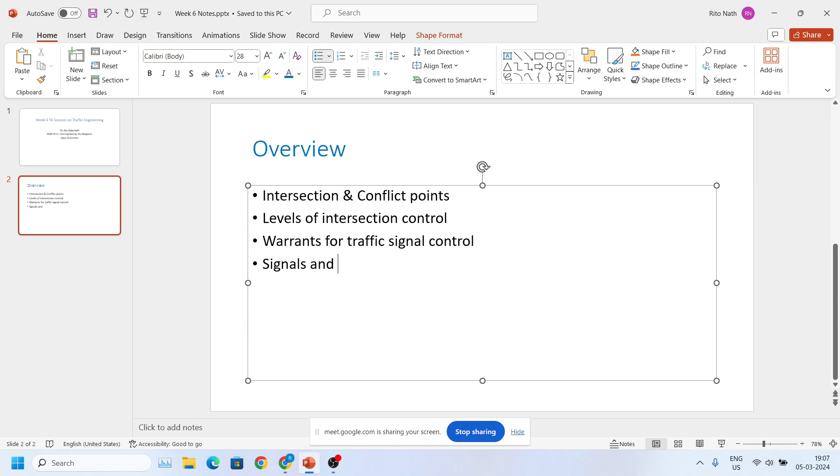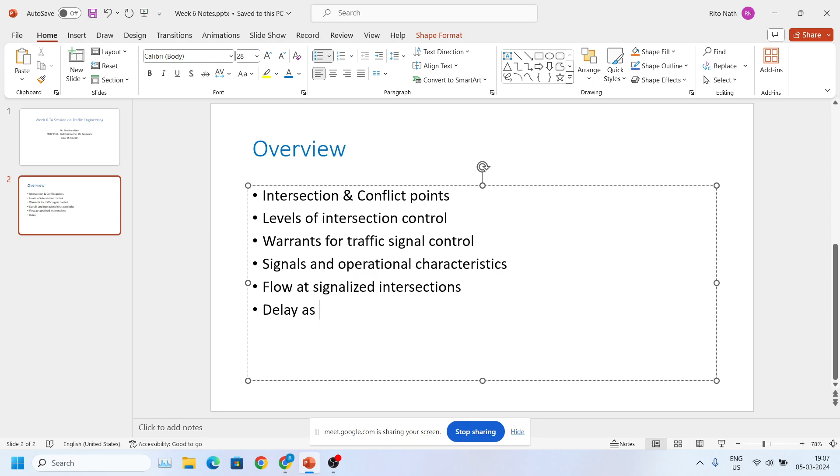Then the next topic is on signals and operational characteristics. Next, I think there was discussion on flow at signalized intersections. And I think there was another discussion on delay as a performance measure. So these are the topics of interest in this session. And let's get started with some of the concepts of the first topic, which is intersection and conflict points.

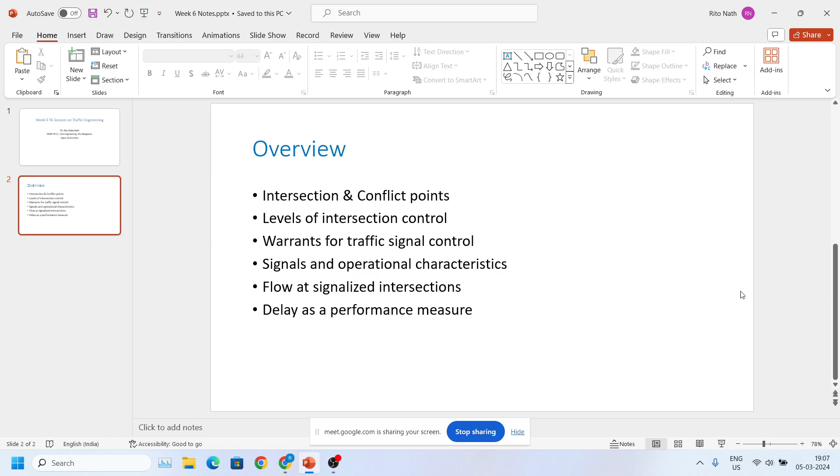So let me, okay, I think someone has joined.

Okay, so let's start with this topic, intersection and conflict points. Now here, first, I think there were basic examples that were given where two or more roads kind of meet, like converge or diverge. So that is called an intersection. And there are certain major accident spots that you can identify because of those. And that's how it's related to conflicts as such. And the key considerations in intersection design, let me write those.

These are satisfying traffic flow needs with available capacity. And one more thing is enhancing the safety. And because you need to enhance safety, you have to identify the conflict points. So conflict points, if I have to define it, they are locations where traffic movements merge, diverge, and or cross.

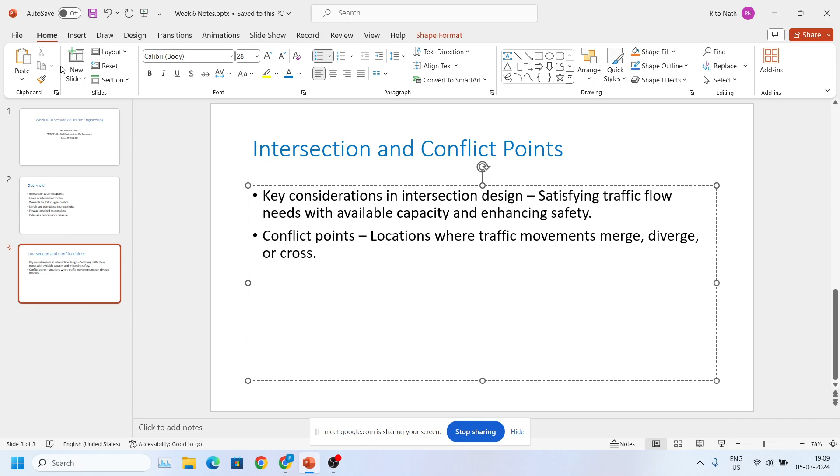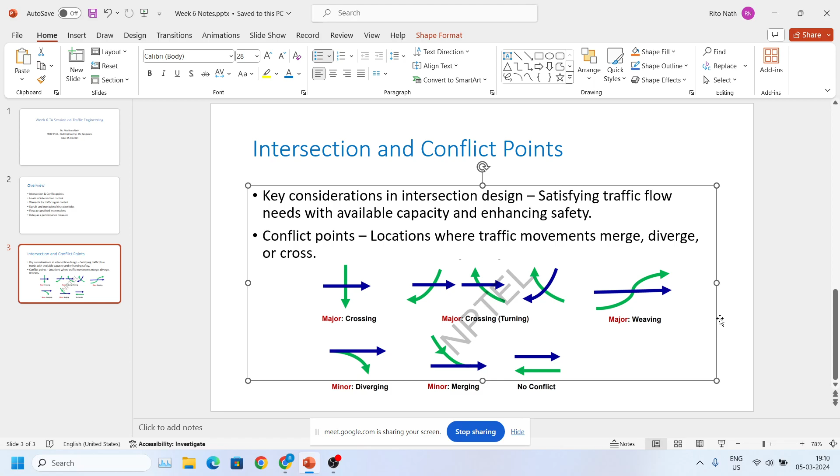So now there were different examples given of these conflict points. So let's see some of these. Okay, so we had this figure in the slides. So here you can see that the first one is showing the crossing of two, say, major roads. One is marked in blue, another is in green. Then there is this crossing that happens. So there is this through moving traffic, and there is some crossing that happens.

And the crossing can be in this kind of a nature as well. Weaving happens as well. And these are examples of diverging and merging. And this is a classic example of where there is no conflict. So these are the potential spots where accidents might occur, and that's why you have to enhance safety, and you have to identify this first. And based on that, you have to come up with certain safety measures that we'll talk about later.

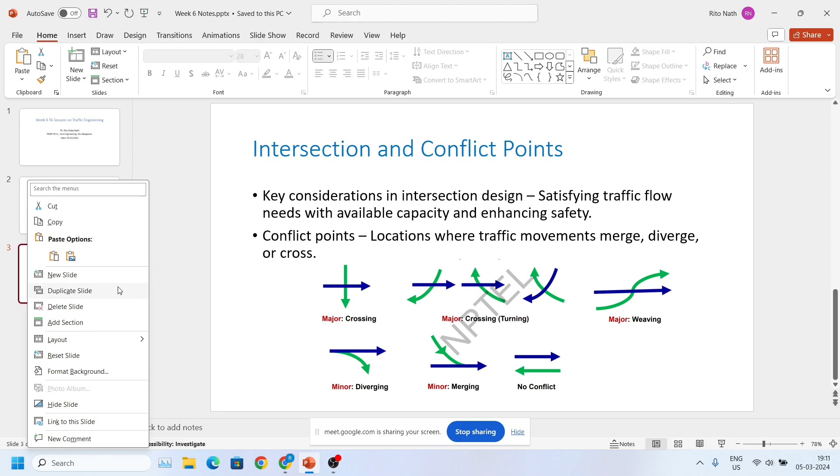So the next thing that was discussed was two different kinds of intersection, and how many conflict points there were. So the complexity of this was shown. So let me open another slide. So it's on intersection and conflict points again.

And let me just do this and insert an image. So these images, these two typical examples were given in the class. So where you have a four-legged intersection, or you can call it a single approach four-legged intersection, and another is a three-legged intersection. And it's nicely shown in the figure where the crossing happens and where the turning happens and the merging and diverging happens. And using this, you can find out exactly how many conflict points you have for both these types of intersections.

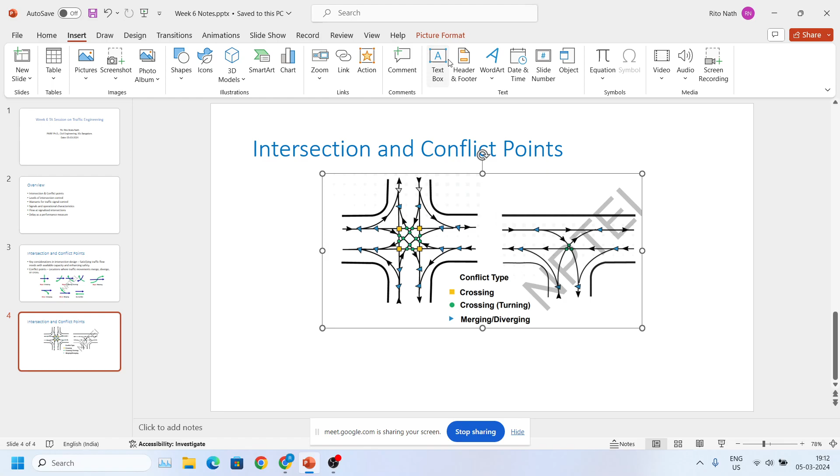So, as I have already mentioned, intersection crashes are related to the number of conflicts that are present in the intersection. Now, if I have to write down the number of conflict points in this scenario, let me do that. Let me insert a text box. So for the first case, it's for a single approach four-legged intersection. So here what you have is, let me increase the font.

So you may be asked to determine the number of conflict points. So there are three different kinds of those. One is crossing plus turning. Then another could be merging, and the other could be diverging. These numbers you can easily find out using these figures, and since these are already marked here, the crossing that you can see here, there are 4 points where this crossing happens. And then there are other crossings that you can also call turning. Those are these green points that are in between.

So these are three for each of the four directions. So 3 times 4, those are 12. So this is 4 plus 12. So this happens in this portion that you can see. And these are in total 16. So this is 4 plus 12 equals 16.

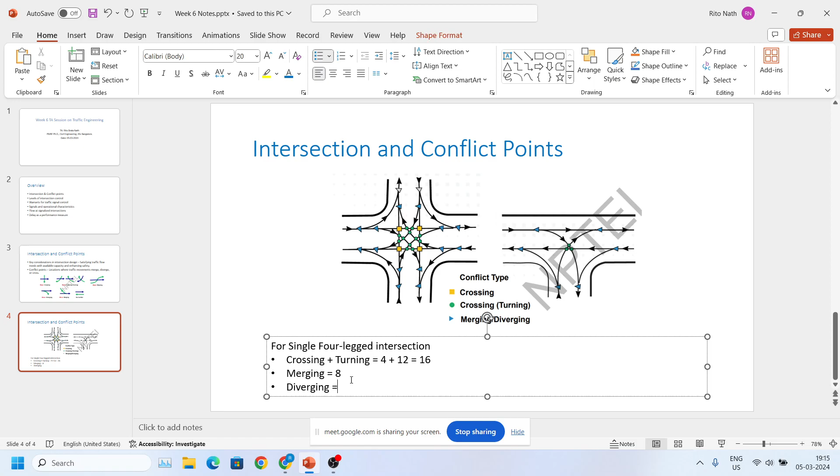Then for merging, you have these blue markers that are shown here. So here, I think you can notice that there is this merging happening here. These are marked as blue. Another merging happens from here. This is marked as blue again. Diverging is also marked as blue here. So this is an example of diverging points as well. And if you work it out exactly, you will find there are exactly 8 merging and 8 diverging points. So the total number of conflict points is 32 in this situation.

Whereas if you look at the other figure, which is a three-legged intersection, you can notice that the number of conflict points is significantly less than in the other scenario. So here, I think you don't even have a crossing conflict type. For the turning, you have around three. Yeah, it's these three that are present. And then you have merging and diverging. This is a merging one. Then this is another merging. And here there's another merging. So you'll find three merging and exactly three diverging.

So similarly, you can write, it's going away. Just reduce this. So for the three-legged intersection, you have crossing plus turning equals 0 plus 3. Then you have merging equals 3 and diverging equals 3. So the total conflict points here is 9. So you can draw these kinds of conflict diagrams and come up with these numbers, and that will tell you how probable it is to have crashes at those intersections. And then we'll move on to the measures and talk about it later.

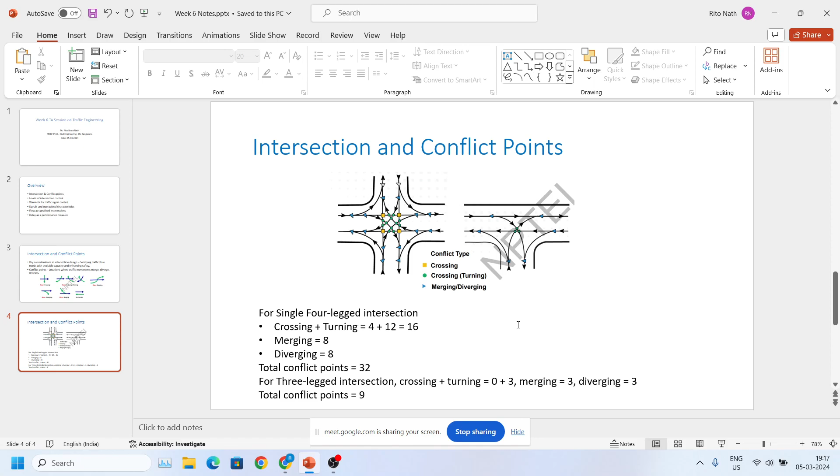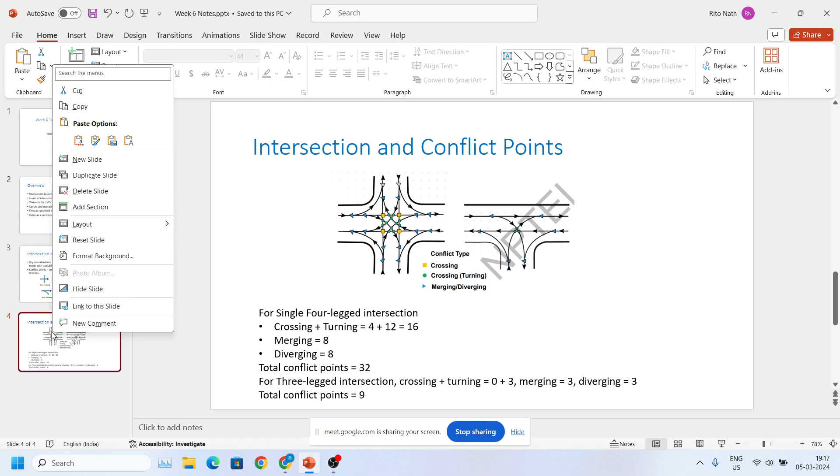So now there were discussions on factors that affect a driver's ability to avoid conflicts. For which there is a simple illustration that would be helpful to understand. So let me just copy this. So here there was this figure which shows that this vehicle wants to move to this lane in this intersection, but this vehicle is also coming from the opposite direction, and this vehicle is also moving in that direction as well. So typically, if you have a buffer zone like a 4 second or 6 second gap here, you can do this movement without any issues.

But if this is not the case, if the density is high and the headway is less, then you might need some measures to control traffic and so on. So, there should be reasonable opportunities for safe maneuvering at the existing volume levels. If they are there, then the driver is able to avoid conflicts. Now, intersection design typically aims to minimize the number or the severity of potential conflicts. So let me write it down. Let's insert the text.

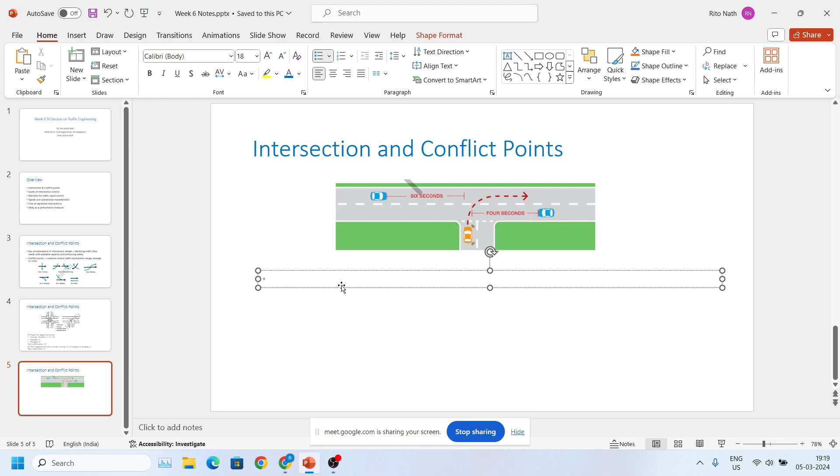So the key points that you have to remember here is that this is typically done to minimize the number and the severity of potential conflicts. And this can happen between different vehicles as well as pedestrians. So it can be cars, buses, trucks, riders, pedestrians and so on. So that's the aim that you have for this intersection design.

And there are different ways of doing it. So different approaches include, one is priority control, the other is space segregation. I'll talk about it in detail later. And then there is time segregation. Okay, so that's the basic concepts of intersection and conflict points. I think the next discussion is on levels of intersection control. So let's move on to that discussion.

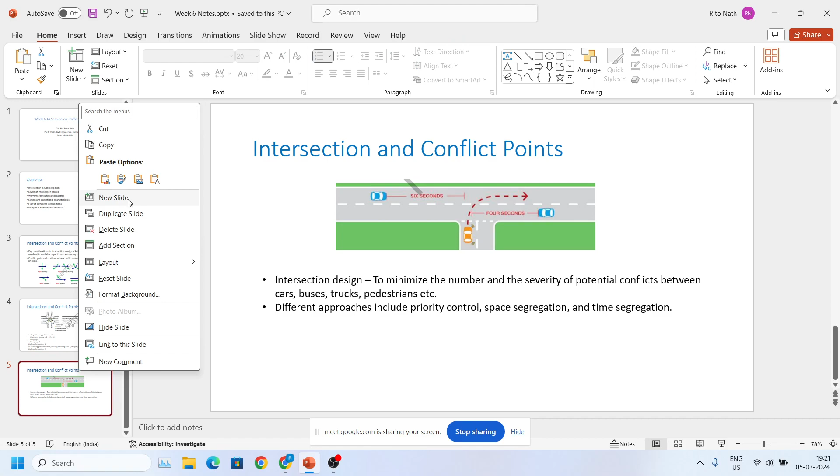So here I'll be talking about levels of intersection control. Okay, so we have three levels of intersection controls, and these are classified as level 1, which is named as passive control. Then you have level 2, which is semi-control. And finally, you have level 3, which is active control.

So in passive control, these are typically basic rules on the road, and this includes signs or road markings and so on. In semi-control, you have a direct assignment of right of way using yield and stop signs. Then you can have channelization as well. And finally, for active control, there are two different things. One is signals, and the other is grade separation. Okay, so these are the basic things.

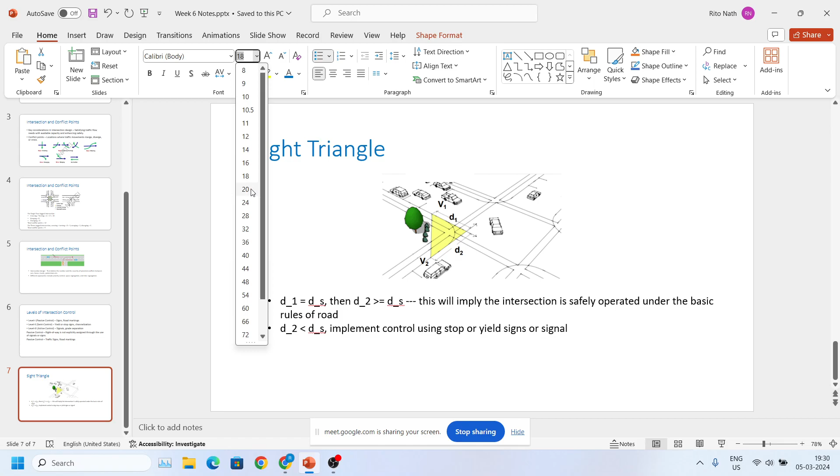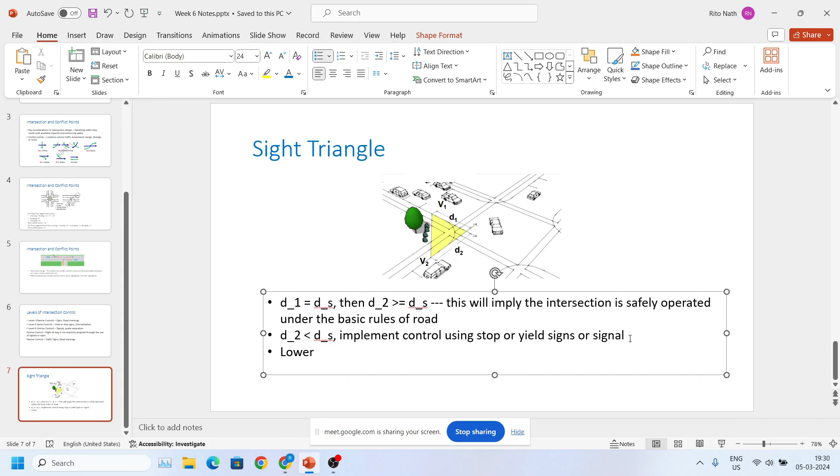I think it was discussed in the class that though this sight triangle should be clearly visible without any obstruction, in the Indian context you don't typically have those kind of scenarios in many places, because you might be having a shop and so on, or there could be some other structures present there. So typically for safe movements, you have to have this kind of a scenario, and these conditions have to be satisfied. So maybe I'll just quickly write down the remaining key points here. Lower the speed limit on the major street, or remove the sight obstruction.

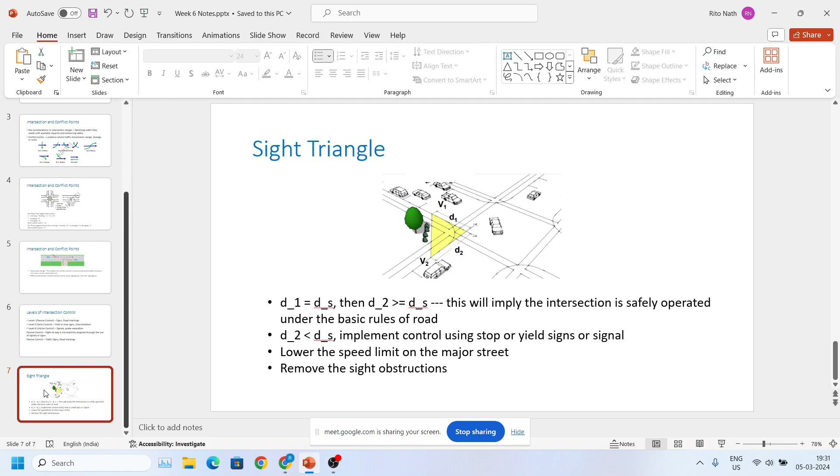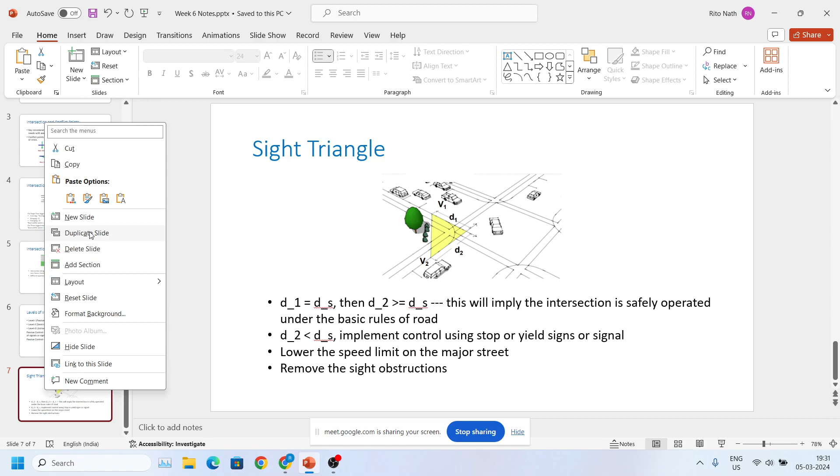Okay, so this was the preliminary discussion on this topic, intersection and conflict points. And after that, in the next module, it was E2, I think. So till now it's a very simple discussion on passive control. We have talked briefly about signals and so on, but that comes later. Before that, we can have a brief discussion on semi-control. So let me write this down. So let's discuss more on these levels of intersection control before I move to the problems that we'll find in the assignment.

So here, let's talk about level 2, the semi-control. As you'll be knowing, this includes the stop or yield signs that I have discussed. So let's quickly have a picture. These are the typical settings that you have for this level 2 intersection control. Here the major or minor roads where this is applicable, where the right of way rule would not be expected to provide a reasonable solution, and the minor street entering a designated through highway, or unsignalized intersection within a signalized area and so on. So that could be the settings here.

Okay, so next, this is a stop sign example to begin with, where the vehicle has to be stopped completely. Then there can be another, the yield sign application, where vehicles controlled by yield signs need to slow down to a reasonable speed. So those are the basic differences of those two. Maybe I'll just add a text.

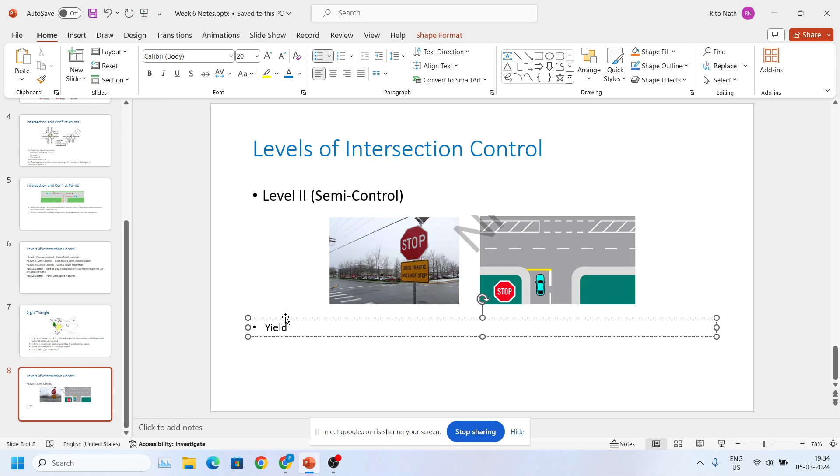So let's talk about the first one, which is the yield sign. Vehicles need to slow down to a reasonable speed. And a stop is not always required, like a full stop. So there can be an example, say, for a channelized turn lane that is separated from the adjacent travel lanes by an island.

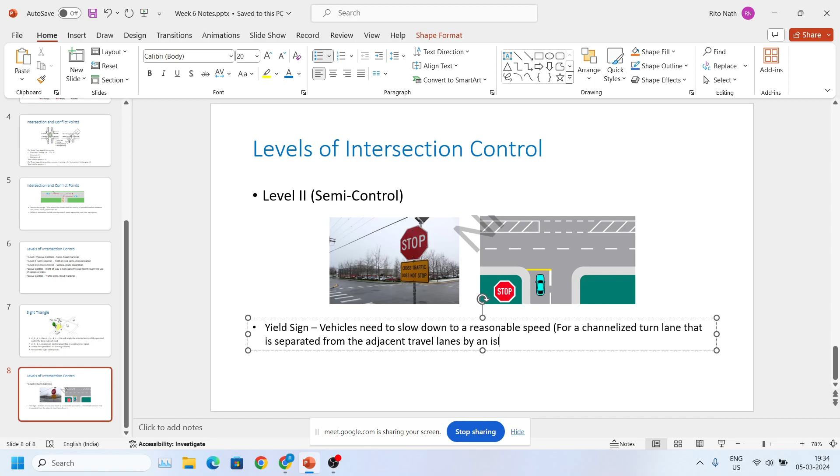Then, if you look at the stop sign, a complete stop is required, as the name suggests, and a stop is always required on minor streets because of one or more of the following conditions that were there in the slides. The conditions included the vehicular traffic volumes on the through street, then other factors such as restricted view, and crash records, like the past crash history records.

So based on that, you have some criteria whether to put a stop sign or not. Like if you have more than, I think, 3 crashes in a year or more than 5 crashes in a 2 year span, then you have to put a stop sign at that intersection. Okay, so the next discussion was on channelization using this concept of level 2. This is a semi-control measure. So maybe I'll just add one more figure.

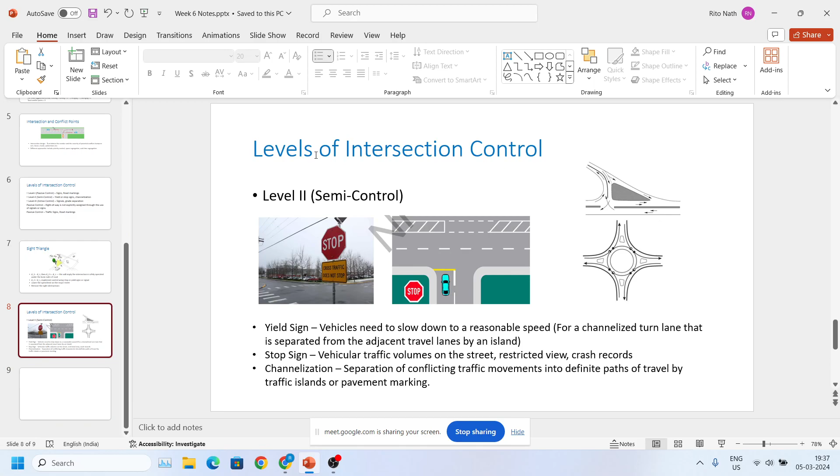So the third one, level 3, is the active control. This is applicable for high intersection volumes, restricted sight distances, and related crash history that I have mentioned. For that you need traffic signalization, which is time-segregated right of way assigned to the various traffic movements, so that will reduce the conflicts.

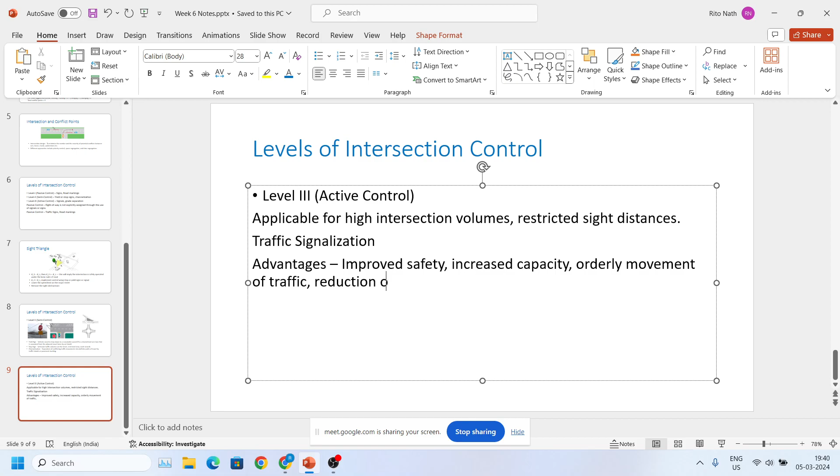Traffic control signals are devices usually installed at grade intersections in built-up areas. They can enhance safety, increase capacity, give orderly movement of traffic, reduce crashes and so on. But there are certain disadvantages as well, so let's write down both. Advantages could be improved safety, increased capacity, orderly movement of traffic, and reduction of severe crashes and so on.

But on the other hand, to ensure all those things, you will end up with some disadvantages, which include increased delay, increased use of less adequate routes to avoid traffic control signals, and a potential increase in the frequency of rear-end collisions and so on, but delay is the main thing here.

Then there was a brief discussion on grade separation, which also falls under active control. You go for it when signals cannot have a significant benefit in reducing the conflict points. This will give you greater safety, efficiency, and capacity. There could be highway grade separations without ramps, and interchanges. Those are examples of grade separation.

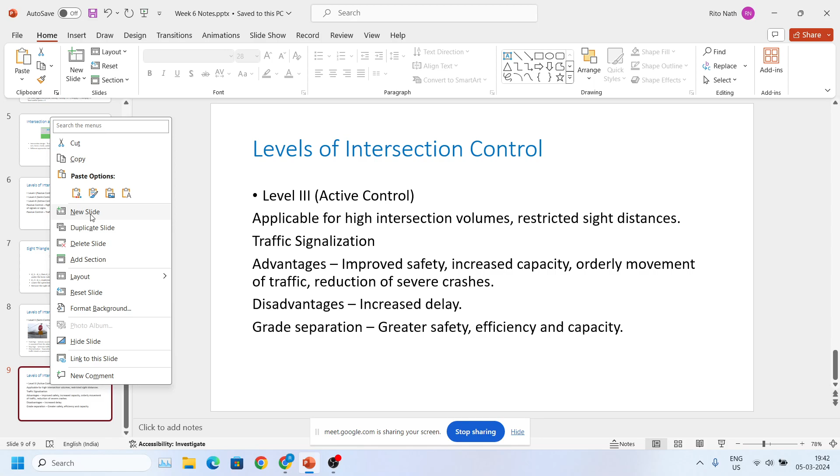Now, there are different warrants for interchanges: highway full control of access, insufficient capacity at the intersection, disproportionate frequency of serious crashes, long delays, and so on. These warrants were discussed somewhat later. But before that, there was a brief discussion on data requirements for justifying traffic control signals, with different kinds of data, one being a period of 12 hours. So let's discuss those data requirements.

Here, the number of vehicles entering the intersection in each hour from each approach during 12 hours of an average day. And there are metrics on volumes: vehicular volumes for each traffic movement classified by vehicle type during peak hours. Then pedestrian volume counts, then delay data, stop time, delay data, and queuing information and so on.

There can be other data requirements like information about nearby facilities, the statutory speed limit or the 85th percentile speed, so speed limits. Then the condition diagram, which tells you the physical and geometric features of the intersection. And the collision diagram, which gives estimates of crashes by type, location, direction of movements, and so on. So these are the data requirements.

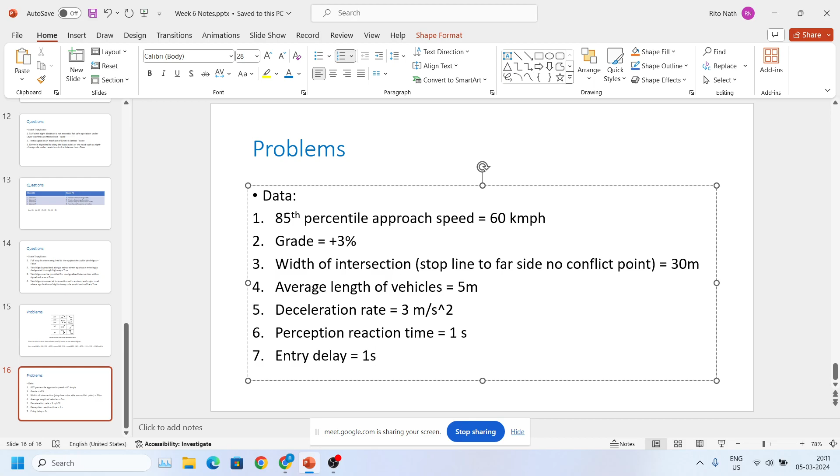Next you have average length of vehicles. So this is 5 meters. Next you have deceleration rate. This is 3 meter per second square. Then you have perception reaction time equals 1 second. Then you have entry delay, 1 second. Okay, so next is cycle length. That's 60 seconds.

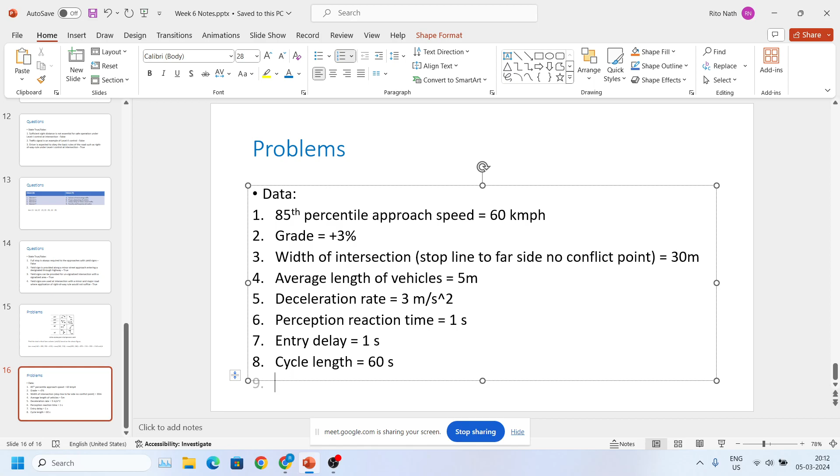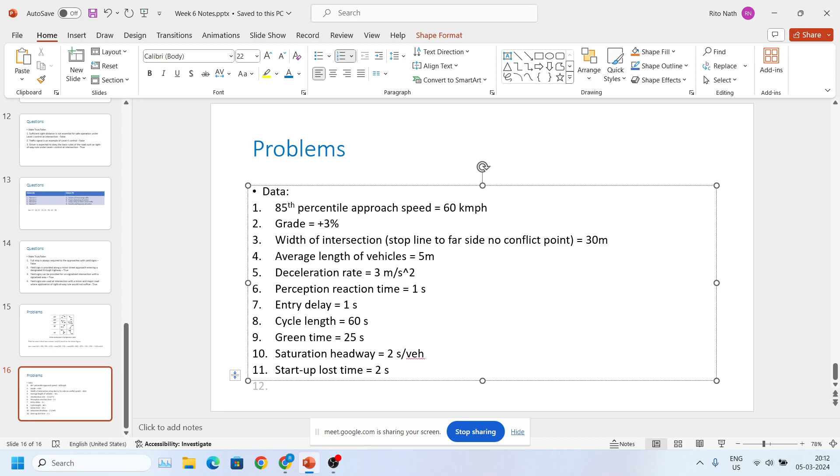Then you have green time. So a lot of data given. 25 seconds. Saturation headway is also given. So that's 2 seconds per vehicle. And then start-up lost time. That's 2 seconds. Finally, I think you have clearance lost time. That's 1 second. So you have to solve a problem based on this entire data that you have. Let me write it down here itself.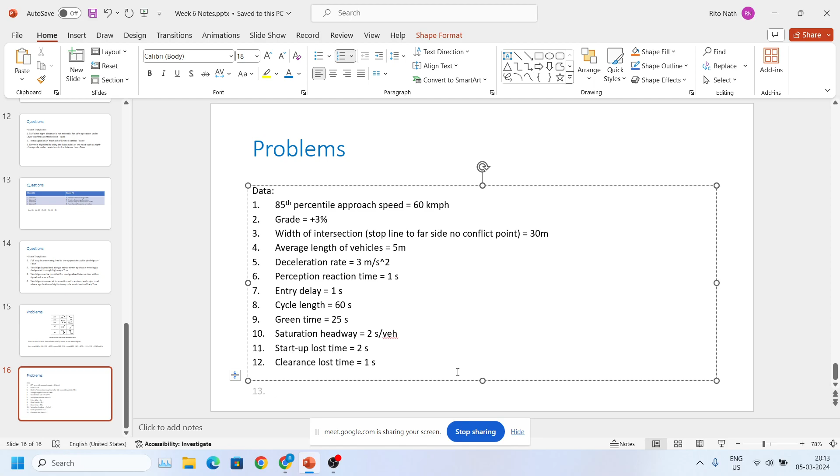Find the yellow change interval in seconds. Okay, so what would be the approach to solve this problem? Let's see how we can solve it. Yeah, so there is a formula that you have learned in the class. So you can directly apply those and you can get the solution. So I'll display it for a bit so that you can get the data and then work it out and tell me the answer, and then I'll solve and check if that is correct or not.

So the value of G, okay. So that is not given, is it? Okay, got it. Yeah, so it's given actually. G is grade, right? It's written here. Grade of the approach. So the answer you are saying is around 4, is it? Okay, so let's check that. I'll give you the solution in the next slide.

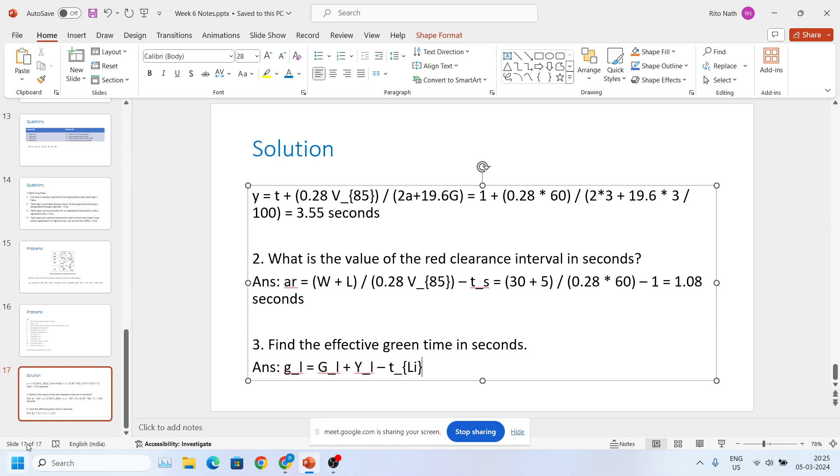First, you have to find the total lost time. So your effective green time, let me write down the formula. So small gL equals capital GL plus YL minus TLi. Now you have to find these components individually. Let's do it in the next slide. So first you can find out what your TLi is. That's the total lost time. So that's L1 plus L2, where L1 is the startup lost time, and L2 is the clearance lost time.

So your TLi is small l1 plus l2. Let's see the data. Startup lost time is given as 2 seconds and clearance lost time is given as 1 second. So that's 3 seconds. Next, this part is done. Then you can find out what YL is.

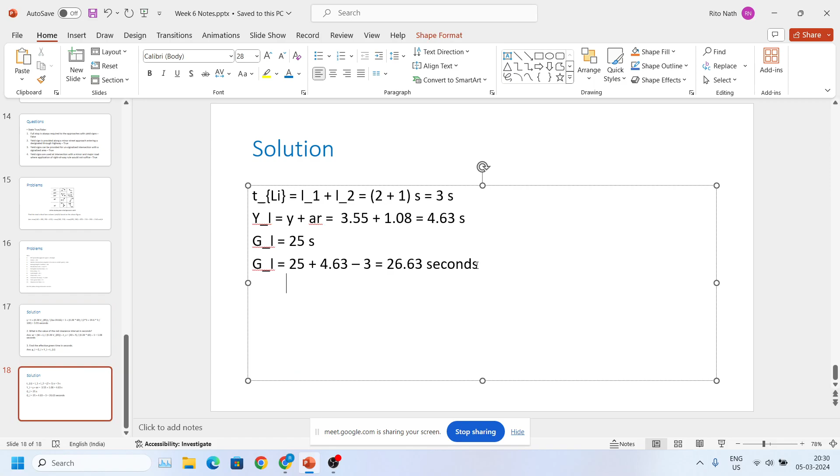Okay, if you're done taking the screenshot, then I'll move to the next problem. Yeah, so let's discuss the fourth one. So this asks you about what is the capacity in vehicles per hour for the approach.

So for this one, I think you have to get the saturation headways first, and then you have to get the effective green as well as the cycle length. So that should give you the value of the capacity of that approach. So the formula is Ci equals Si times gi divided by capital C.

So here you have to find the individual components first. So what is your Si and so on. gi is, I think, this should be small gi, sorry. In fact, this I wrote it as L, but this should be i ideally. So let me just quickly modify this. Yeah, now it's consistent. So gi you know already. C from the data it should come, and Si I think you have to calculate.

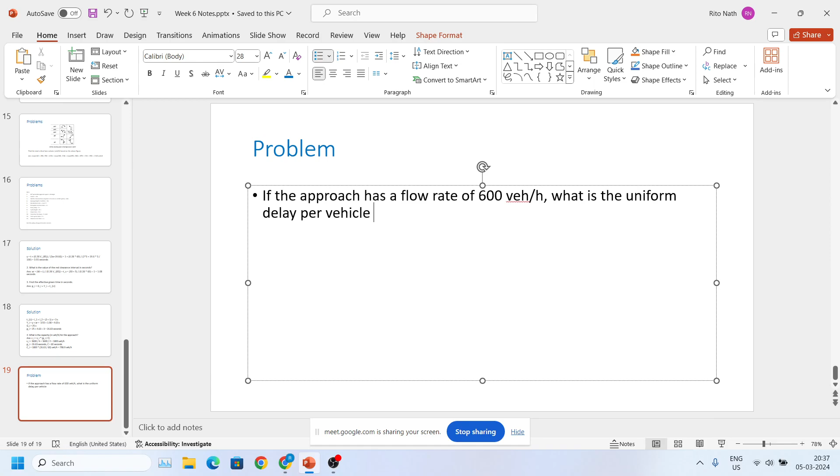So the next one is somewhat similar, but it has some new data, I think. Okay, so if the approach has a flow rate of 600 vehicles per hour, what is the uniform delay per vehicle expected under these conditions? The conditions are given above, right? The data that have been shared before.

So for this one, first I think you have to get the V/C ratio, and accordingly you have to find this uniform delay per vehicle. So the volume is given as 600 vehicles per hour. C is also calculated already. Let me just quickly check what is the uniform delay formula. Okay, I haven't gone into the discussion of delay as a performance measure, but anyway, let's solve this problem.

So this uniform delay UD equals 0.5 times C, where C is cycle length, times 1 minus g by C, this whole square, divided by 1 minus g by C times X. Capital C is the cycle length, g is the effective green time, small c is the capacity of the intersection approach, and X is the V by c ratio or the degree of saturation.

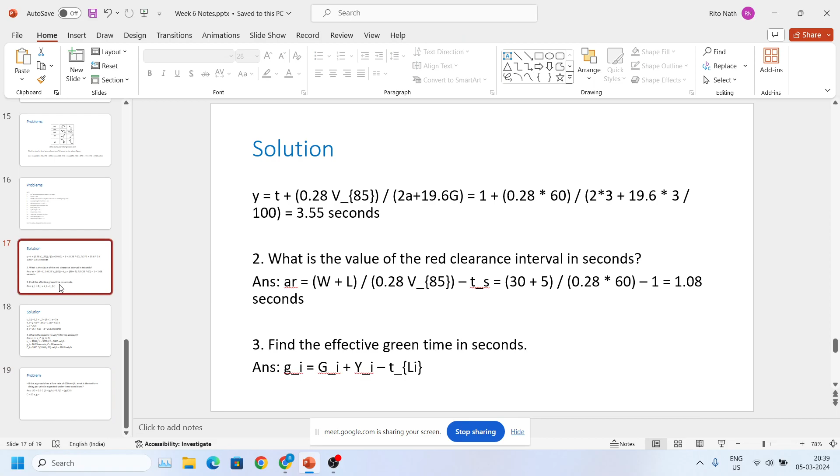Okay, so let's find out these values. Capital C is the cycle length, which is given as 60 seconds. Then you have small g, the effective green time, which you have calculated: 26.63 seconds. Let me check if I'm getting it correct. Yeah. Then you have small c, which is your capacity. Okay, something's off. Just checking this convention of capital C and small c. So there is a doubt. Okay.

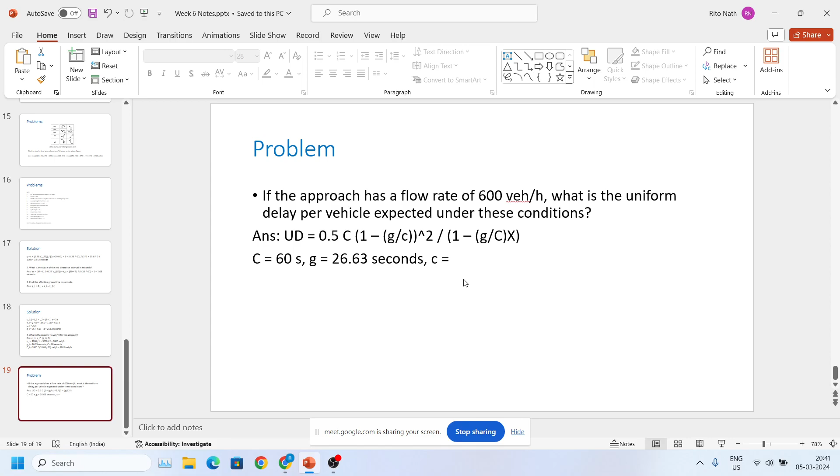Okay, small c is the capacity of the intersection approach, and that is given as 798.9 vehicles per hour. And then you have to find x. Okay, I think here I have written it wrong. This should be capital C and this should be capital C as well. Small c is the capacity of the approach, used in calculating x. So x is the V by c ratio, 600 divided by 798.9. Slight mistake I made, but now it should be fine.

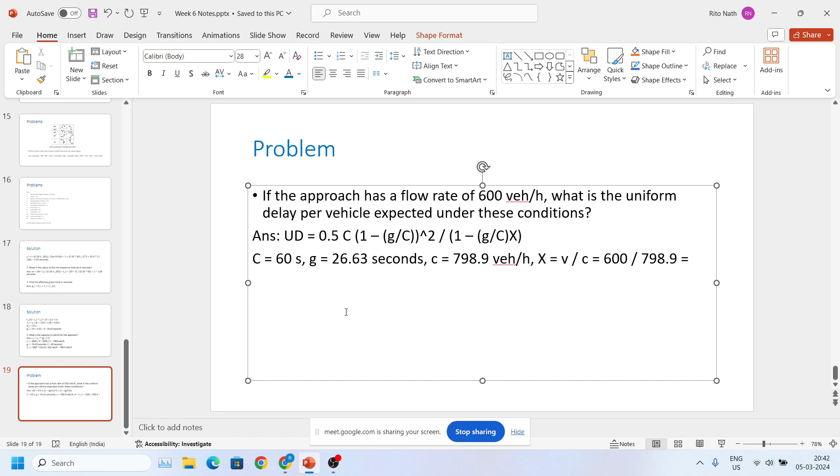So this gives you a value of 0.75, and now we just put in the values. UD is 0.5 times 60 times 1 minus g by C ratio, which is 0.44, squared, divided by 1 minus 0.44 times 0.75. So that should be your answer in seconds. Okay, so let's calculate it.

Yes, or it should be around 14.04, I'm getting. Okay, so did anybody get this? Yeah, I think it should be the correct answer. V by c is 0.75. Yeah, correct. 13.95, I think you got it because of some approximation issues. So yeah, I think that should be the correct answer.

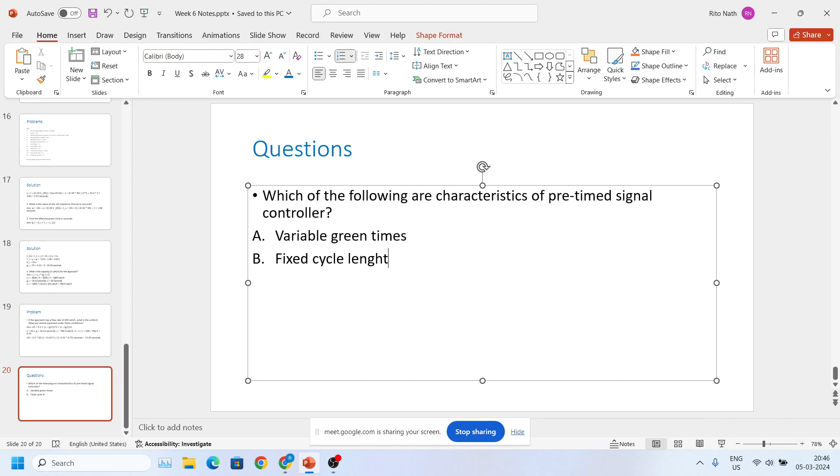So there is one question which says which of the following are characteristics of a pre-timed signal controller. If you go through the lectures, you'll find there are two different types: actuated signal and pre-timed signal controllers. Option A is variable green times. Next one is fixed cycle length. Next is fixed sequence of phases. And the fourth one is used at isolated intersections.

So what would be the answer to this? It's simple, right? There can be multiple answers to this as well. Okay, then what you got? BCD. Yeah, that's correct. So B, C, and D, all of these are correct. There are no variable green times in pre-timed signal controllers. There are fixed green times, fixed sequence of phases, fixed cycle lengths, and they're typically used in isolated intersections.

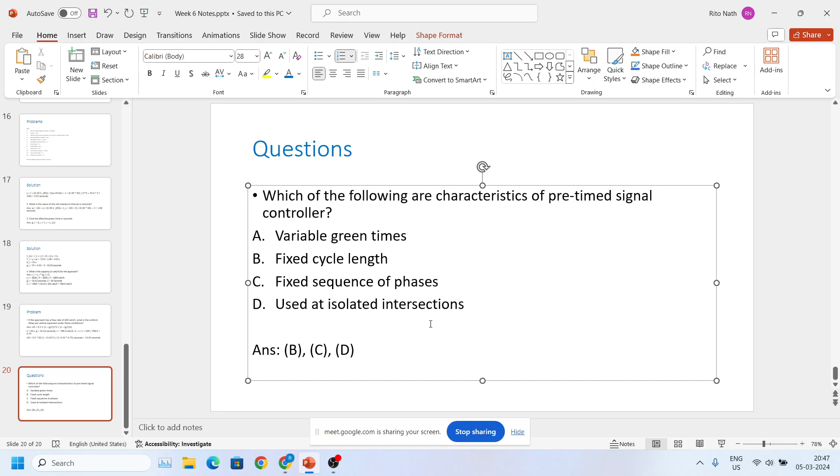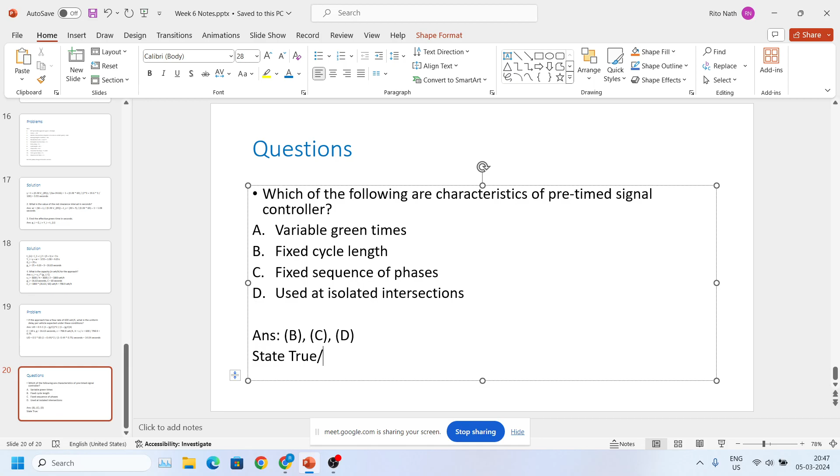So let's do true or false. This says critical lane group represents that lane group in a phase which has the lowest flow rate. So what would be the answer to this? It's again directly from the slides. It's simple. Okay, maybe I'll just put some more into it.

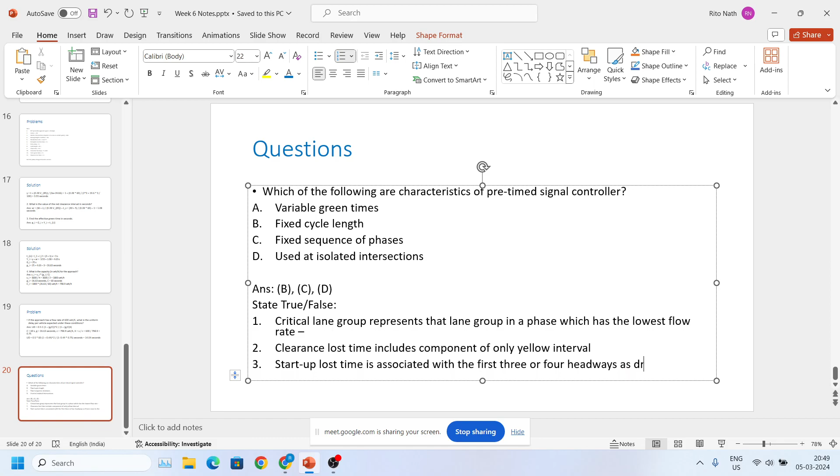Clearance lost time includes component of only yellow interval. Next is startup lost time is associated with the first three or four headways as drivers react to the green signal. Next you have total lost time: it's the difference between the startup lost time and the clearance lost time.

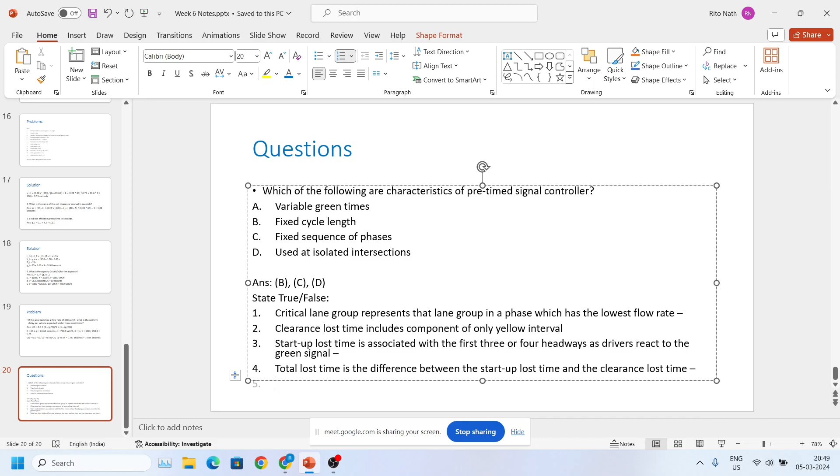Next is end gain is the sum of yellow change interval and red clearance interval. So let's see what would be the answers to these five true or false type questions. Okay, any answers to this? Okay, not yet. So lane groups and movement groups were discussed in the slides, so it should not be too difficult to answer these. Let's see if anyone could answer.

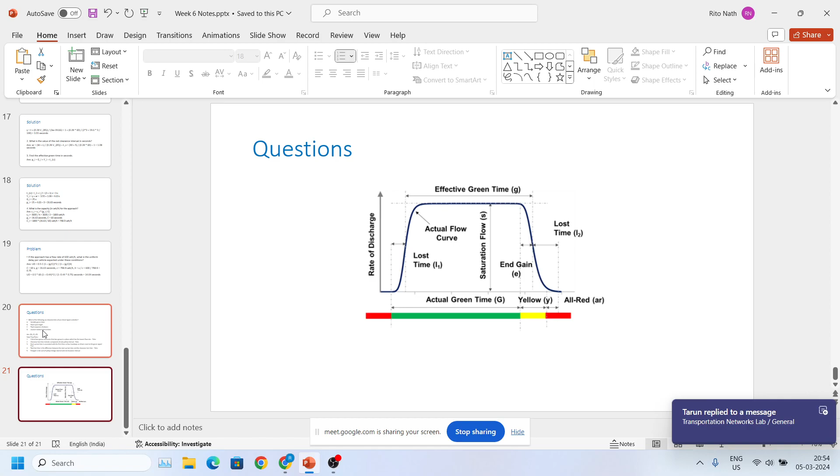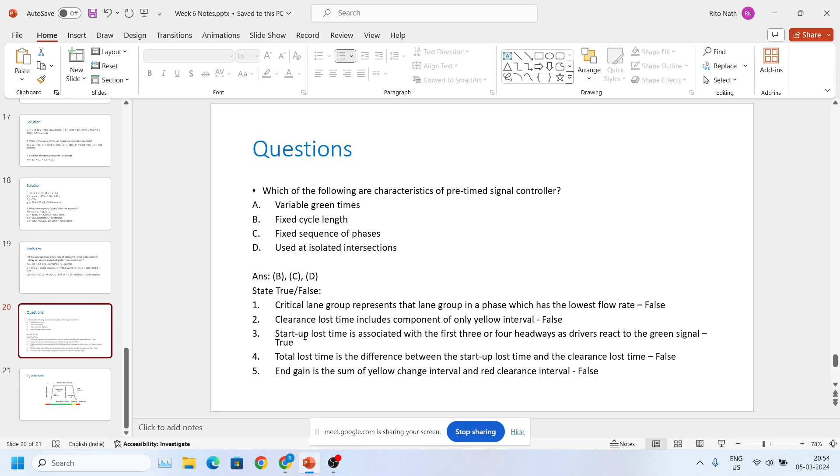Next is total lost time is the difference between startup lost time and clearance lost time, which is not true because the total is L1 plus L2, the startup lost time plus clearance lost time. So this should be false. Then end gain is the sum of yellow change interval and red clearance interval. End gain is this one, which is obviously not true. Let me quickly check. So this is also false. Okay, I think that's pretty much it. In the assignment, let me quickly open it.

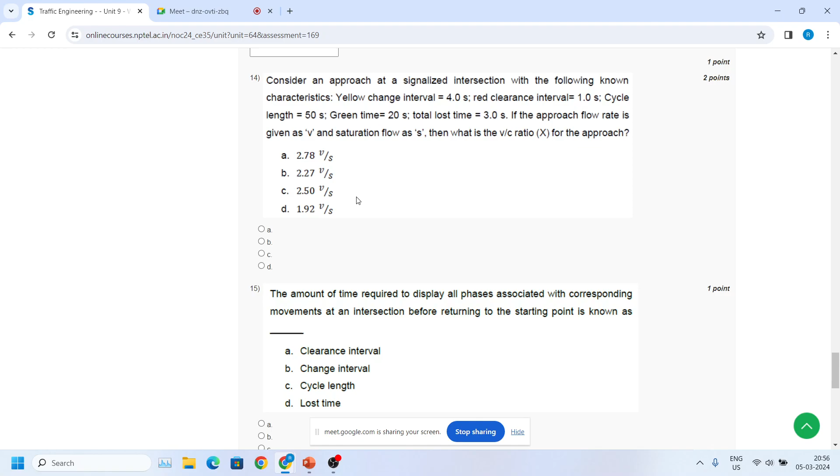Yeah, this is also, I think, you can answer it. So it's again related to signaling and so on. And I think we discussed a similar problem in the class. So yeah, not exactly with the same values, but yeah, these V by C ratios and so on, the capacities and these things, effective green, I think we saw similar concepts there. Then, yeah, this is another simple problem, I think, directly from the definitions. This is also given in the slides, and many, I think, are listed down as well.

And this is again a true false type problem. I think you can answer this as well. So I think, yeah, with this assignment, it's good that I have solved something different from what is here. So it's up to you now to solve this. And I think you'll be able to answer all these questions. It should not be too difficult a job. So yeah, I think, okay, is there any message? 14.1, please. Okay.

Yeah, I won't be giving you the answer or discuss anything. But anyway, this one, okay, you're talking about. Yeah, so yellow change interval, red clearance interval, these are given. Cycle length, green time, total lost time. The approach flow rate is V and saturation flow rate is S. Then what is the V by C ratio? Yeah, so this you have to do in terms of V and S. These values are not given. So I think in my problem also, I had V by C ratio as a sub problem.

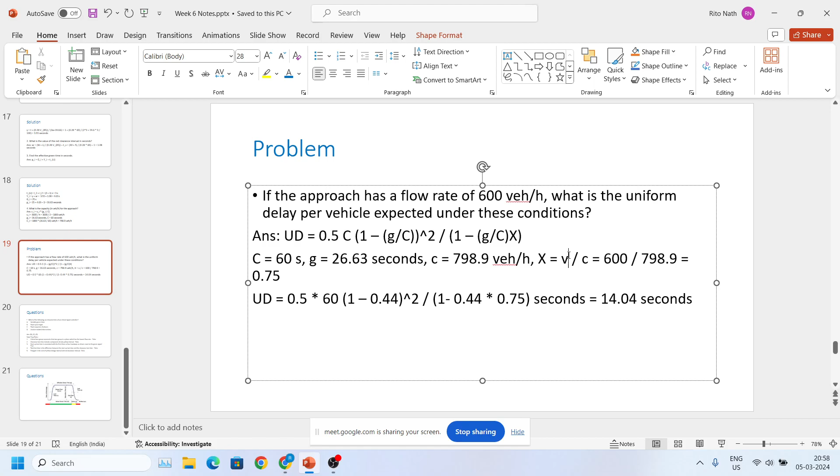So I think here, if you see this, maybe I did it here. Yeah, this V by C ratio, the X that I found out here was having this. So here V is given as V only, there is no value. The C you are finding out from these previous ones, and it depends on the saturation flow, which is also given as S here, no value is given. So you need effective green and the cycle length. Effective green, I think you have to find out. This green time and everything is given, and cycle length is given as well. So that should not be a problem, right?

So once you have that, it's pretty simple. All the formulas are there in the slides, so I don't think it should be a problem. I think you'll work it out, right? Formula, okay. It's V by C ratio that you are asked. V is V, so that's done. C is what you have to find out here. And for finding out C, the formula is already written in the slides. So I cannot give you everything. I won't give you the answer right away. It's up to you now to figure out the answer. I hope it's clear. And if you still have a doubt, we can discuss it next week once the assignment solution is released.